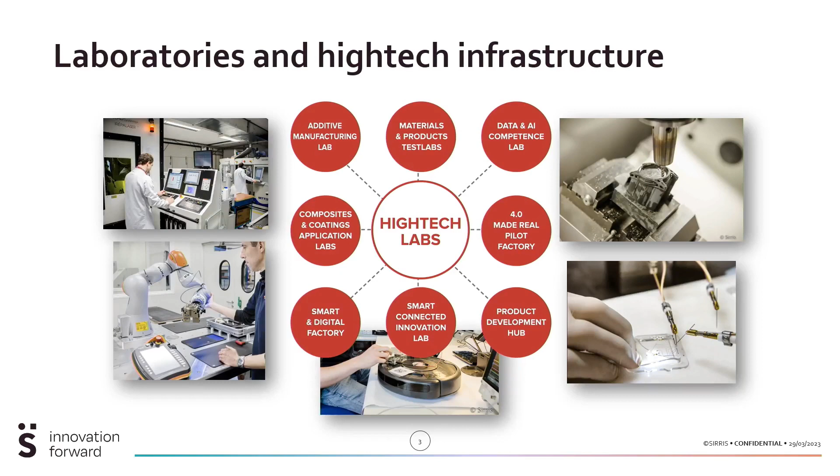Okay, my name is Jan Kempeneers, as already said. I work at Sirris, and maybe for some persons present who don't know Sirris very well, Sirris is the collective center for the technology industry. And what we try to do is we advise and help companies to implement innovations. As you can see, we are located at some 8 different sites in Belgium, and most of the sites also dispose of a lab where we have domain-specific equipment. With this equipment, that allows us to do feasibility tests, feasibility studies, and build proof-of-concept setups for companies. But at the same time, it also gives us hands-on experience, so that we can give advice to companies based on hands-on experience, actually.

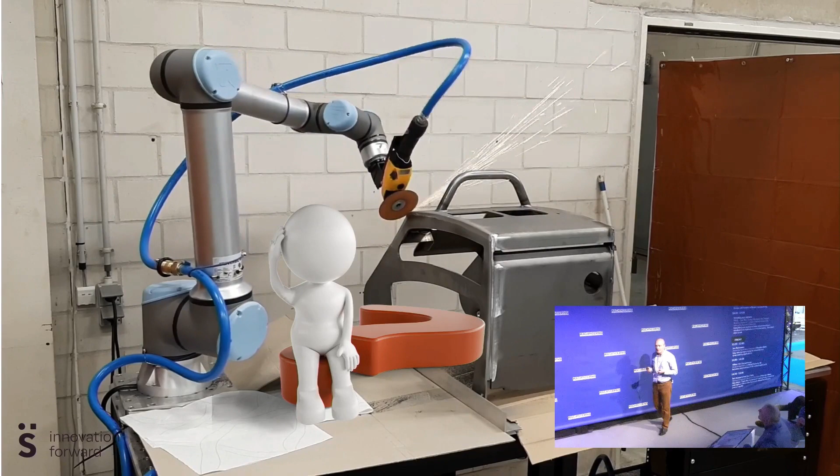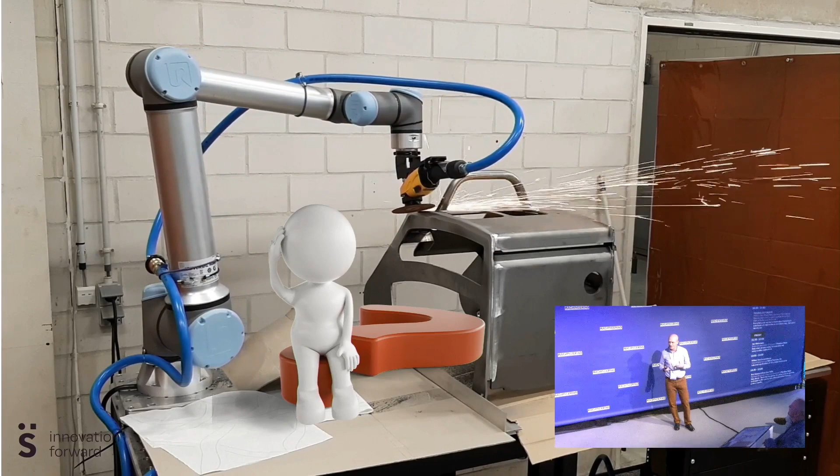Okay, so this talk is about finishing with cobots. And when you hear that for the first time, I can imagine that a lot of questions come to your mind. First of all, why the hell would you want to do that? I mean, isn't the cobot meant to be safe around humans? And how can that be with a grinding tool? Is a cobot not meant for lightweight applications, clean environments, and isn't grinding a more dirty and dangerous environment? And even if you would want to do that with a cobot, can a cobot do that at all? I mean, can it achieve the required finishing quality? Can it handle the vibrations caused by the process, and so on? So all these questions, I hope that I can give a little bit of context and some answers to those questions during my talk today.

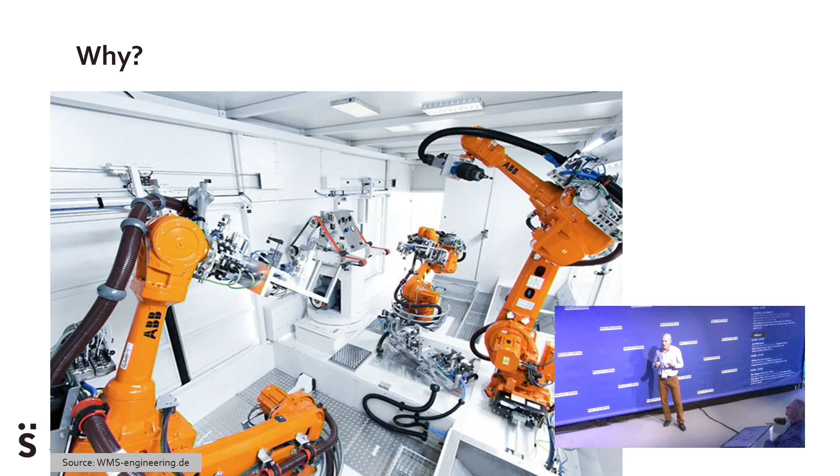First of all, let's start with the question why. Why would you want to do that with a cobot when these industrial solutions exist, and they exist for many years, decades even? Well, this is the reason why. Because this is the reality at most SMEs, at most small and medium-sized enterprises here in Belgium. And in my opinion, that is already a good reason why you start looking for alternative approaches when the other approaches do not satisfy your need, okay?

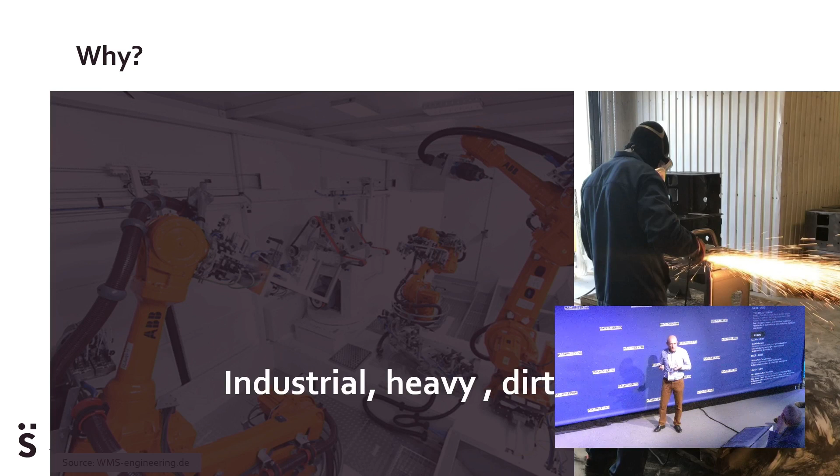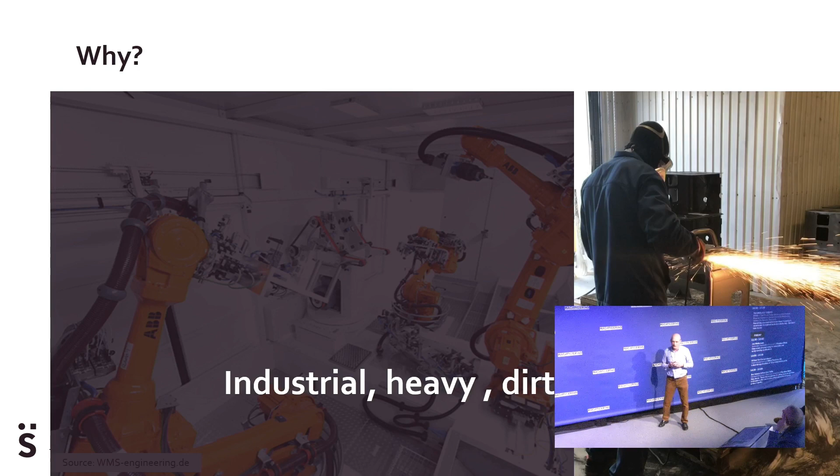But then remains, of course, the question: yes, okay, but if you cannot find a solution for this small series work, it's still an industrial and a heavy and a dirty process. Can a cobot really handle that? Before we dive into that question, let me take you back a few years, to what Sirris has been seeing in the market when we started following the trend of cobots. That was around the year 2012. We have seen at regular intervals companies contact us with the question, can you deburr this product, or can you grind this product? And I just want to show you a few of them, so that you get a feel of what kind of questions that we encounter from the companies looking for alternative solutions to do deburring and grinding.

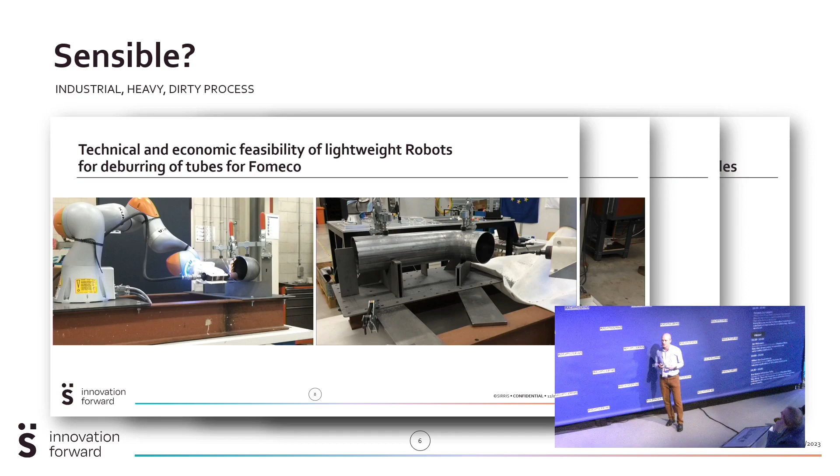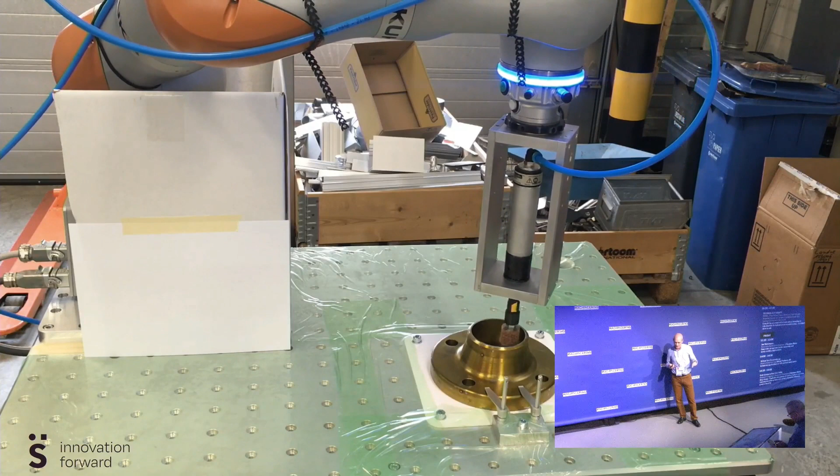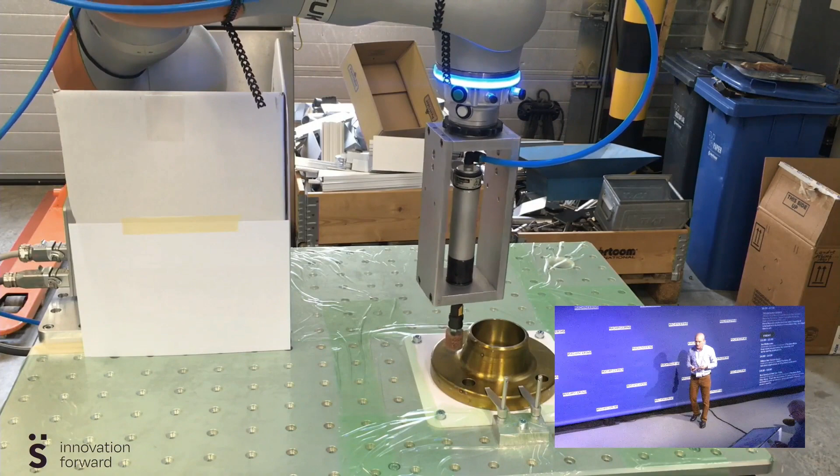The removal of the coating in this particular case is done on the inside of the flange. The movement the robot is doing is a force-compliant movement, pushing with a constant force all the time to the outside of the flange, and thus we can remove this coating. This is just a small example I want to show you. I'm going to show you a second one, and then we dive back into the story.

The second example I want to show you is a project we did with a company called Group Nivelles. Group Nivelles is a manufacturer of bathroom furniture. They make wash basins, but also floor tiles and side panels for showers.

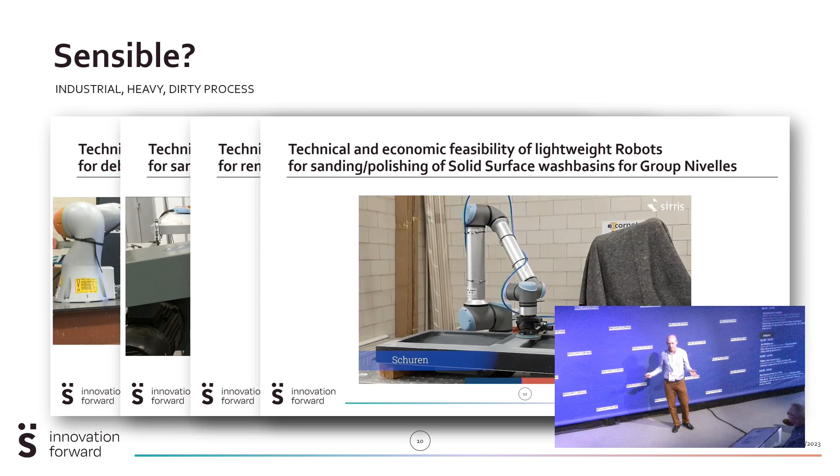They make those products out of a composite material, consisting of two components, molded in an open mold, atmospheric molding. Every part that has been molded needs to be finished, because when the part comes out of the mold, the surface is not fine enough. The surface roughness is too high to serve as a finished product, so every visible surface has to be ground smooth.

They already had experience in the past with industrial grinding, and they were now looking for alternatives. So we did a quick setup and a quick test with them to see whether a cobot could do this grinding, and especially important for them was: how flexible can that be? Can our operators program that?

Just to be clear, those two cases were not implemented at those companies the way we showed it here. They took other measures to improve their process. But nevertheless, when companies come with those questions to us, they can see what is possible, how easy or how difficult it is, and they can make a judgment based on facts.

So, back to the original question. It's a dirty and a heavy industrial process. Why the hell would you want to do that with a cobot?

I'm showing this picture with also a welding robot, cobot, next to it. A few years ago, in 2017, we did a project together with Agoria and the Belgian Welding Institute on cobot welding, and we had exactly the same reflexes, the same questions from industry: why the hell would you want to weld with a cobot? There are industrial welding cells, they are mature, you can find them anywhere, you have multiple suppliers. Why would you want to do that?

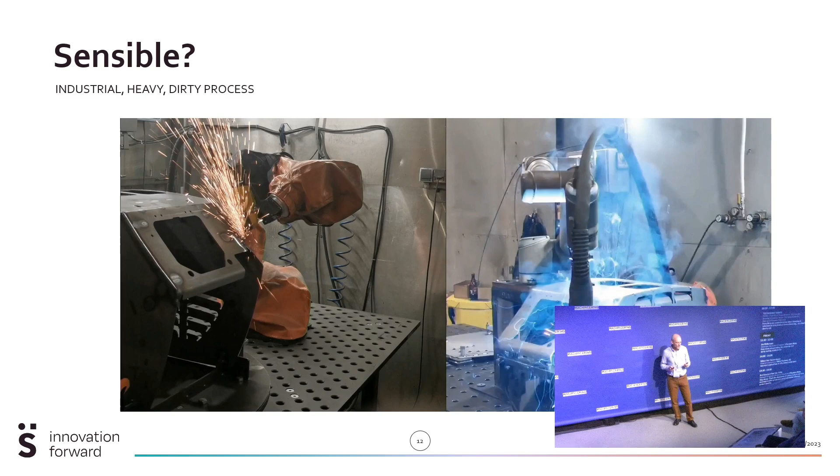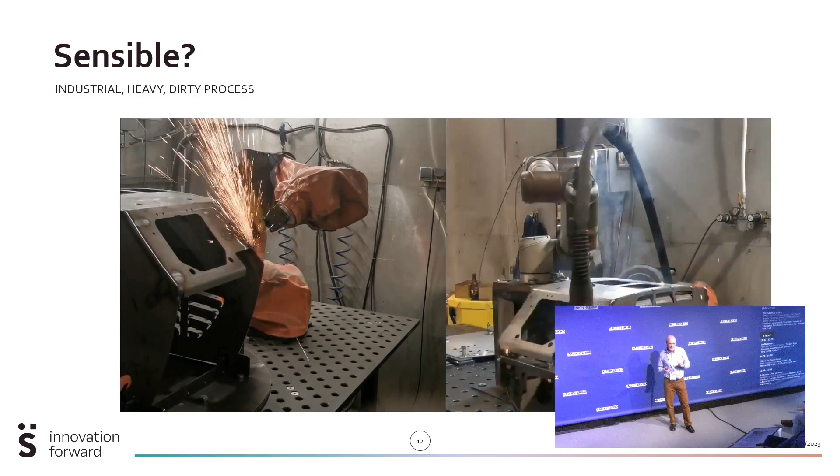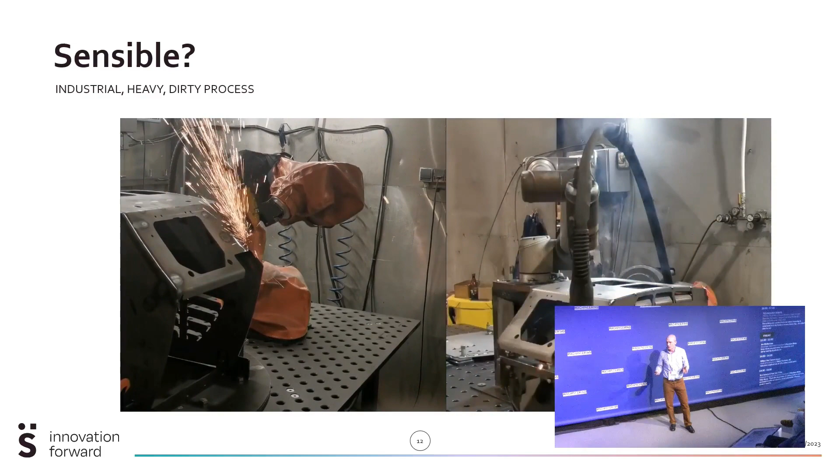So that's the main point I want to make. Is a cobot meant for this? No. Can a cobot do this? That's an entirely different question. At Sirris, looking at these new technologies, or these combinations of new technologies, and finding out where the boundaries are, what you can do with it, that's typically what we try to do for companies, to reduce the risks on their side of doing investments that may not suit their needs, or may suit their needs and solve a problem.

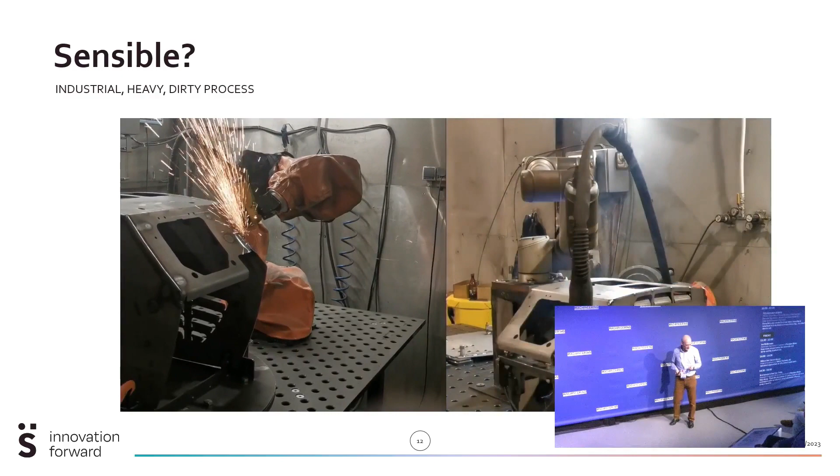So remains, of course, the other aspect: safety. How can it be safe? Well, let's be clear about that. These are not applications where you use a cobot for its collaborative aspects or collaborative features. It's not the case. And when you look at the topic of safety in machines in general, all machines are equal—there is no difference between robots, cobots, or other machines. There's only the machine directive that needs to be followed.

The machine directive requires that you do a risk assessment, that you put in place all measures possible to reduce risks to a maximum extent. And the same goes for cobots. In my opinion, not only for grinding and welding, but for all cobot applications. There are practically no cobot applications today without additional safety requirements, and that is due to the technical specification 15066.

Machine directive says you have to follow the standards. The standards give you the description of the state of the art. The standard 10218 refers to the technical specification, so the technical specification is the standard 15066. This technical specification reduces your possibilities of building a safe system without additional safety requirements to practically zero. There are very limited cases where you can get away and claim that you still adhere to the technical specifications if you don't put additional safety measures in place.

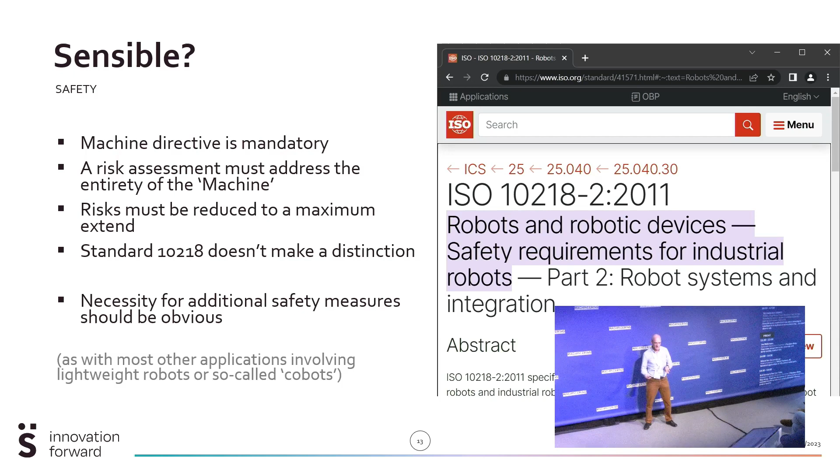Okay, so now that we have that topic out of the way - if it's not for safety, and in my opinion it's not because it's cheap. A cobot is no cheaper than a robot if you compare machine to machine. A cobot compared to a robot with the same payload, the same reach, most of the time the cobot will be a little bit more expensive. So it's not for its safety, it's not for being cheap - why would you use a cobot?

Well, there are two reasons left that we see in the market why people are looking at cobots: one, easy to integrate, and two, easy to operate. And those two domains might be a little bit of an advantage for the cobot for grinding. I'll explain to you why.

Easy to use, easy to set up and integrate - well, a cobot inherently has force sensing in its arm. With these force sensing sensors, with the data from those sensors - originally meant to be safe around humans - you can also do other things. You can steer processes like grinding, you can program force compliant movements and so on.

Easy to operate? Well, that is actually thanks to recent software developments that make it possible today to program these force-compliant paths based on that data from those sensors in a very convenient, user-friendly way. And those two together give a little advantage to a cobot over an industrial robot.

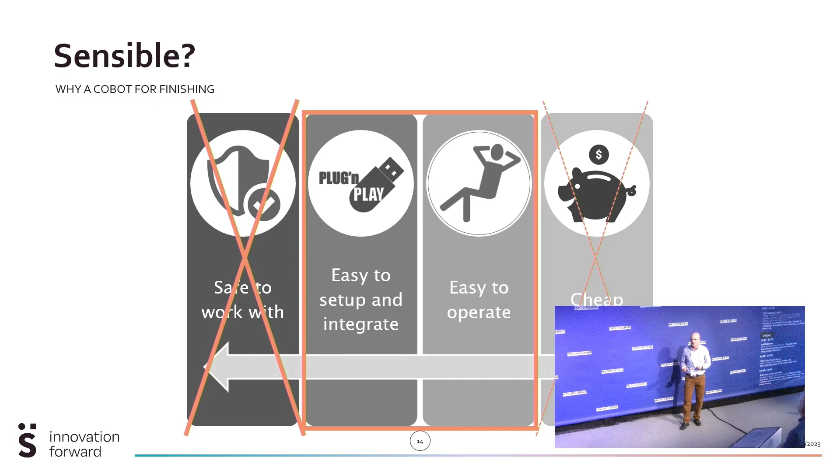Okay, before we go any further into more challenging cases, I would like to give a big shout out to Vlaio, who made this research that we've been doing for the past few years possible in the CoboFin project. So in the CoboFin project, we have the possibility to look into more challenging cases and see for which industrial cases cobot grinding could really be interesting, where could it find its place?

Okay, there are two cases that I picked out from this research project that I want to show you and talk to you about what is possible. This first case is sheet metal - actually it's a support of a medical bed that you see. You see on the picture to your left these black spots, which are actually the result of welds on the backside of the plate. The plate itself has been shaped underneath a press bench, so the plate itself is double curved - it has curvature in the horizontal direction and also in the vertical direction.

And the radiuses of those curves are varying. They are not constant, so it's a complex surface, difficult to program typically.

The black spots that you see are not only decolorization, but they're also a little bit swollen material. Actually, the material has expanded due to the heat input from the backside of the weld.

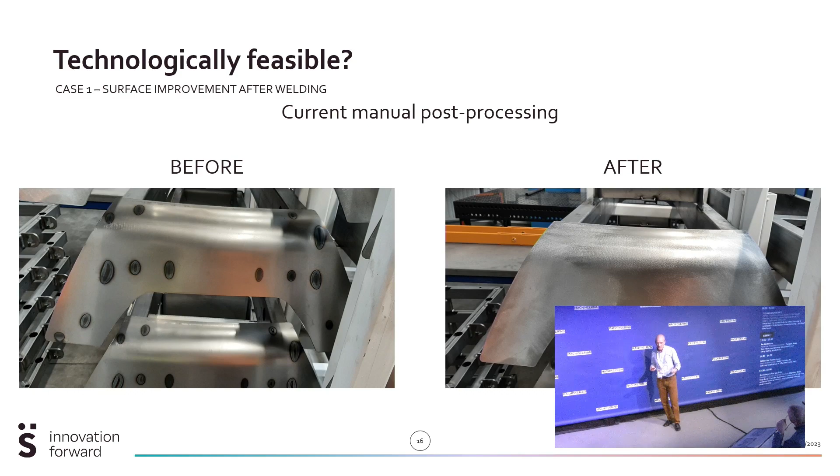Now, because this is a visible part of a medical bed, it has to be clean, it has to be shiny. You can't have any bumps when you put spotlights on it. So this excess material has to be grinded away, but it is a very delicate job because the grind process especially needs a very soft landing.

Your grinding disc has to land very softly on the surface. If you land hard, you get an indentation already, and also a very soft retraction.

And the second big challenge was, this was programmed online, very user-friendly, but the problem was the slightest inclination you give to the disc, you're not grinding in the middle of the weld anymore. You have to grind exactly in the middle of the weld, because otherwise you're grinding on the side of the bump, and you're not grinding away as it should.

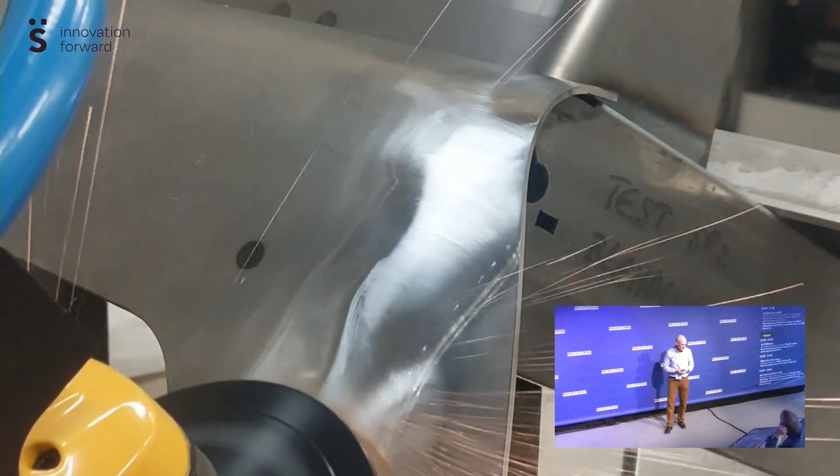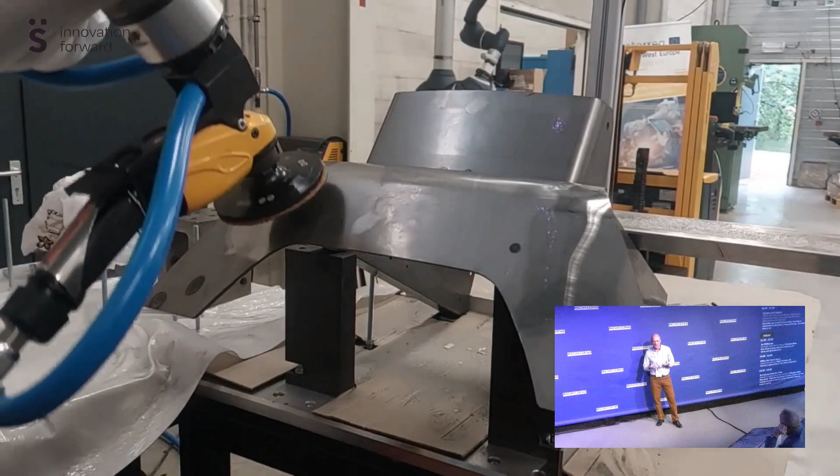So we found approaches and ways to do that, to have a good result in the end, let's put it like that. And once you have found the right approach, the right parameters, also the right force with which you push to the surface, because all these movements are force-compliant movements, then it's rather easy to replicate on other products and so on.

And you should also not forget, like I said in the beginning, this plate is pressed under a press bench, but you also have a little bit of spring back because of the elasticity of the material. And the spring back in all the different parts is not always exactly the same. So there is quite some tolerance on the incoming products. This is why these force-compliant movements are so important.

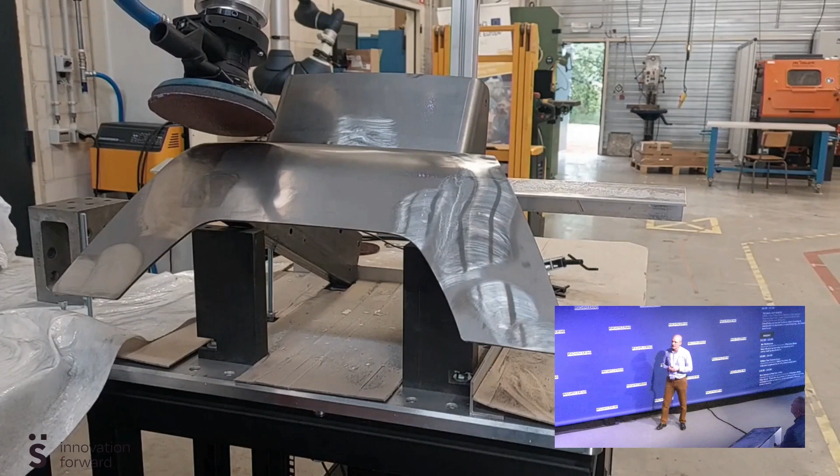So this is the grinding step, and next is the sanding step. The sanding step is simply smoothing out all the scratches made from the grinding. And that is much less critical to program, because as you can see, we use a soft intermediate pad on our sanding machine. That already gives you a lot of tolerance to make less accurate programming, I would say.

And also the programming movements that you see - let me try to start that movie again. Oops, that's the wrong button. So the movements that you see the robot make, they are actually movements like it was shown to the robot. It was really teach by demonstration. So you take the robot head and you simply move it the way you want it to move afterwards, and then you replay it at a constant speed.

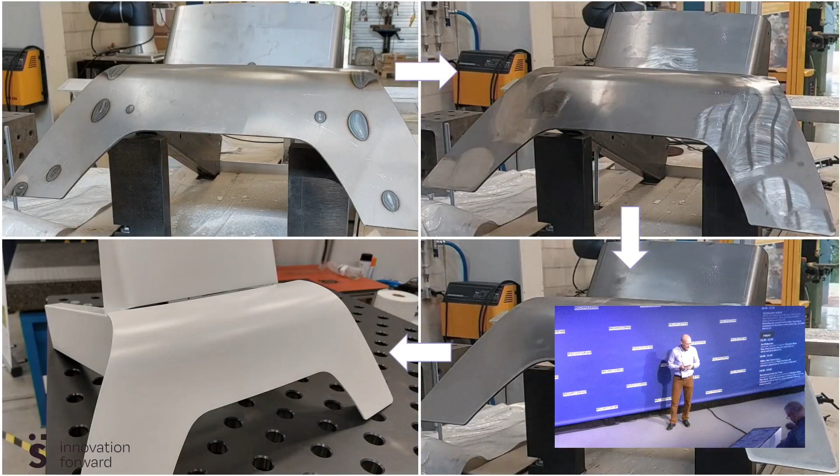So all these software developments make this possible nowadays. Okay, so this is the different steps and the final result. Now, the last picture, when you follow the arrows, the last picture after painting is of course a very important one, because it's only after painting that you see most errors, actually most defects in a surface finish.

So the company for which we did this project wanted to do this final evaluation and actually paint one of the parts, and they found that the quality was very good within what they needed.

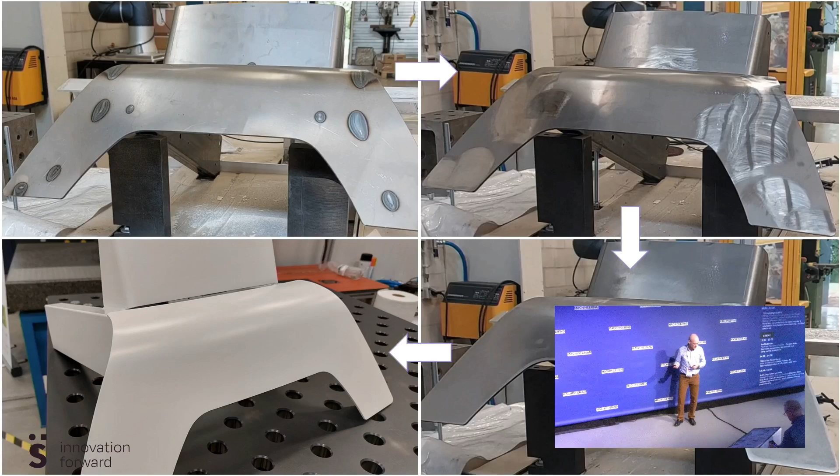Another challenging case that I want to talk to you about today is a deburring case. This is the deburring case of composite trays like you find in the self-service restaurants when you stop at the side of the highway. These trays are the result of a pressing process. So you have these flashes, as they call them in the plastic industry, or burrs as we call them in the metal industry. These flashes have to be removed.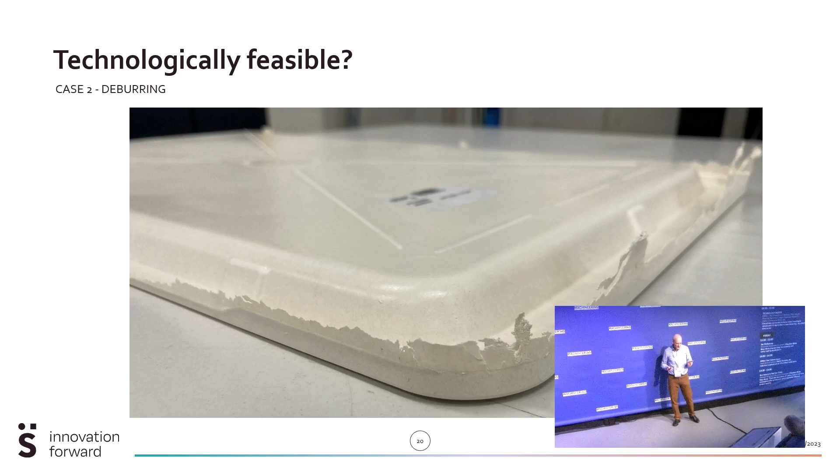And today, these flashes are removed in a machine. It's a machine setup, and the machine setup works like this. You have a grinding stone mounted on a spindle, and the spindle is mounted on a movable sled. The movable sled is actually spring-loaded, and there's a template underneath the tray that is being worked, but the template actually pushes the sled away. So when the template turns, the sled moves away, and that way the grinding stone is always following the contour of the tray.

Now, this company was interested in finding an alternative solution because they wanted to experiment with different types of trays, different shapes, different sizes, have more freedom actually. Now, if you start designing more types of tray and start selling more types of tray, that means that your batch sizes become smaller.

With the machine, if you want to change between types of trays, first of all, you need to have a template for each type of tray. But second, every time you change type, you have switch over time for your machine. You have to make modifications to your machine. So they were looking for a more flexible way, something where they could do one tray after the other, different shapes all the time.

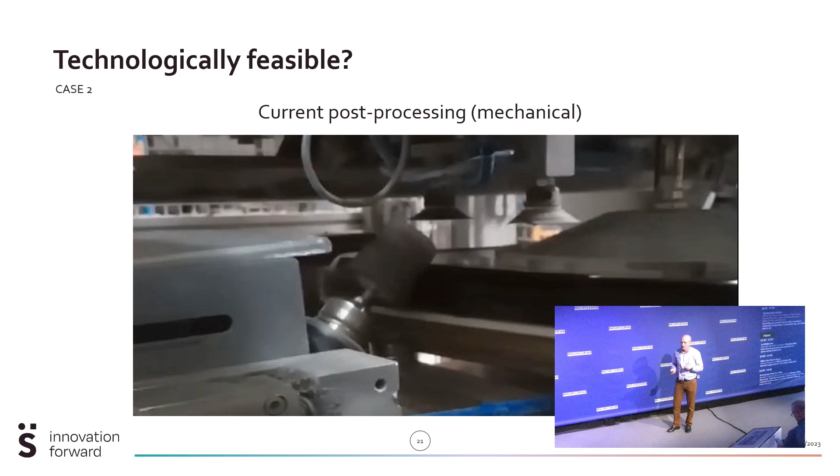And that is why they were thinking about a robot or a cobot for doing the deburring. So in this project, first of all, we tested a lot of different abrasive materials, because when we look at these challenges, we try to take a step back and look at it first very broadly, and then focus on what needs to be done, just to make sure that we don't miss any side solutions that could also have a big impact.

Then we tested again a lot of strategies and parameters like we did in the previous project, but I deliberately put in some pictures where we have bad results. So it's not always first time you find immediately the solution. You really need to show some perseverance to find the right parameters, to find the right approach.

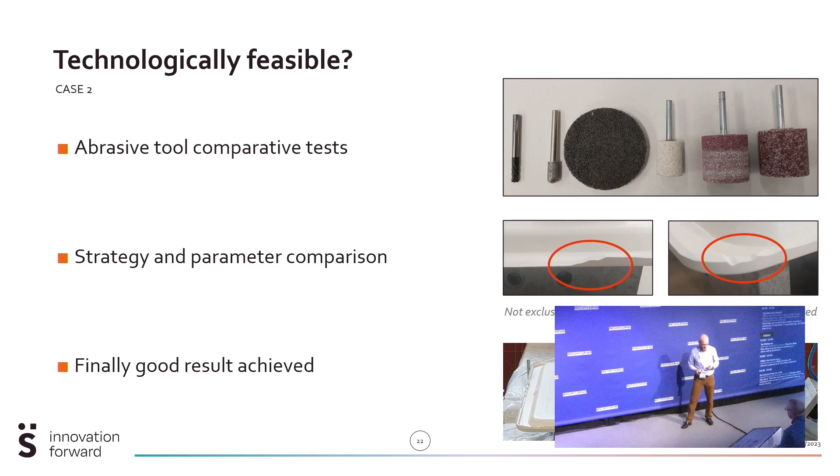But once you found it, you can really replicate it relatively easy on similar products of your company. And then finally, luckily, we are always happy when the results are good, but sometimes the results are not good either. But luckily, in this case also, the result was actually satisfactory for the customer.

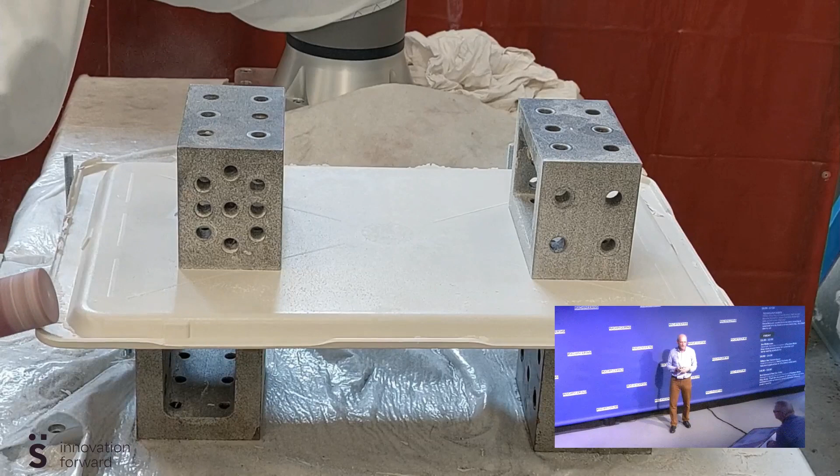And as you can see also here, it's very important, maybe I forgot to mention, these trays are made out of chalk with glass fiber reinforcement. But it's only chalk, and you know, if you start grinding on chalk, it's immediately gone. So also here, it's very important to have a very soft landing, a beautiful constant speed, and also a very abrupt moving away from the surface. The slightest few tenths of a second that you stay on the surface, you already have an indentation.

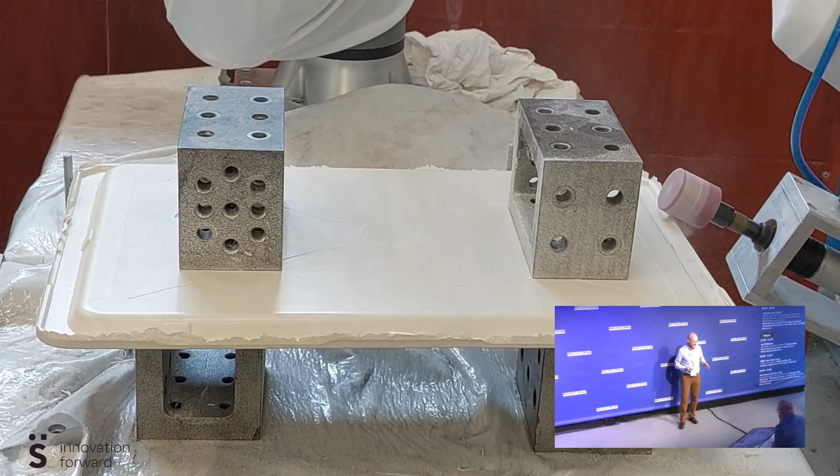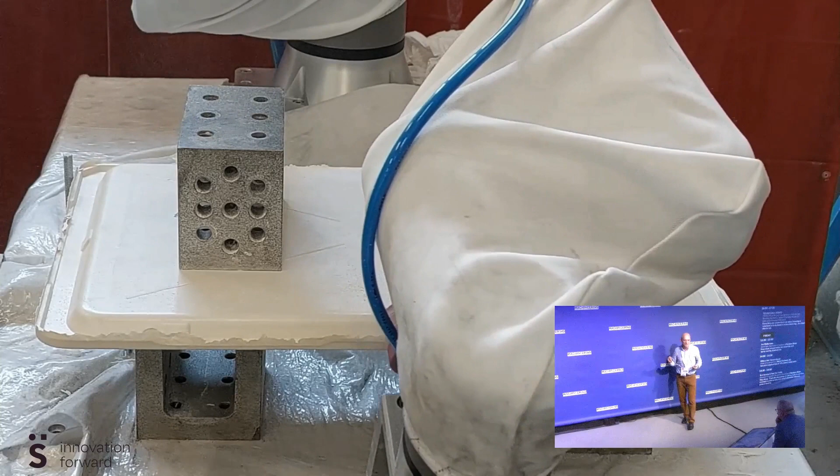Programming is not that difficult here either. It's some discrete points, and the entire movements are force compliant. So the points that you teach don't need to be exactly on the surface where it has to be ground. They have to be in the vicinity of. So that goes relatively quick as well.

So, is grinding with cobots technologically feasible? We believe the conclusion is yes, but there are some side notes to make, some side remarks to make. First of all, yes, even high gloss polishing is possible. We researched in a research project high gloss polishing of metal parts for the injection molding industry, and high gloss polishing up to their requirements is possible actually. So the force feedback loops that you have in your cobot are fast enough, are accurate enough to have this good result actually. But two side notes to make.

First of all, automating the movement solves only part of the problem. Very important is spindle and abrasive tool selection. That will always remain very important. But a more annoying one actually is knowing when to stop grinding is a challenge. And that will always remain a challenge in my opinion.

When you have manual grinding, manual polishing, manual deburring, it's the operator who is constantly watching his work and is constantly determining: do I go over it once more or can I stop now? And when you automate things, all you have is the time that you are doing this process. The process is much more constant, so it's much more predictable. That is true. But you have variation on your incoming material, and you certainly have variation due to the wear of your abrasive tools. Now, this is a downside for automating with any machinery, but it's also a little plus side for the semi-automation or lightweight automation with a cobot.

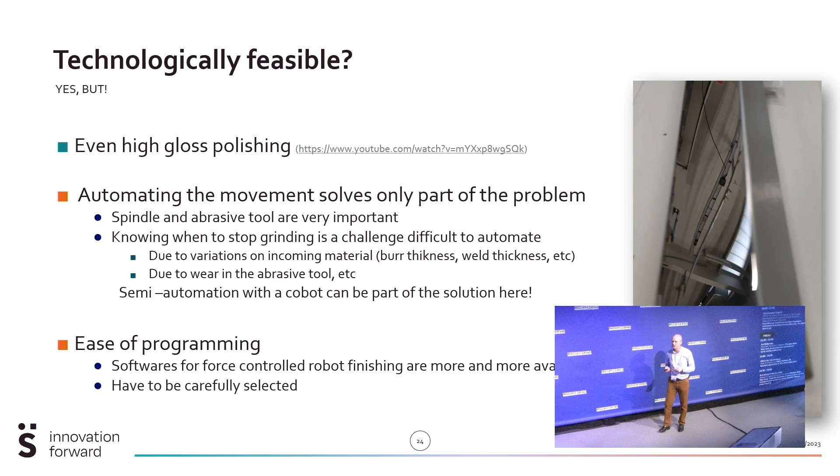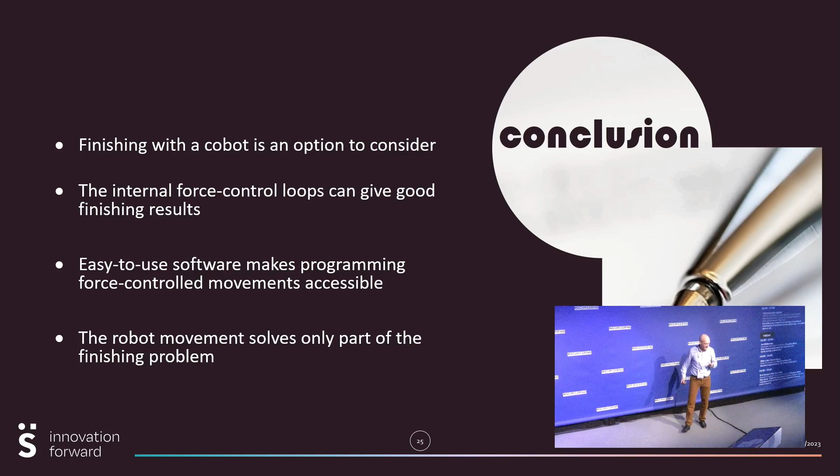So those are the main things that I want to convey, or hope that you might remember after my little talk. Finishing with a cobot is an option to consider.